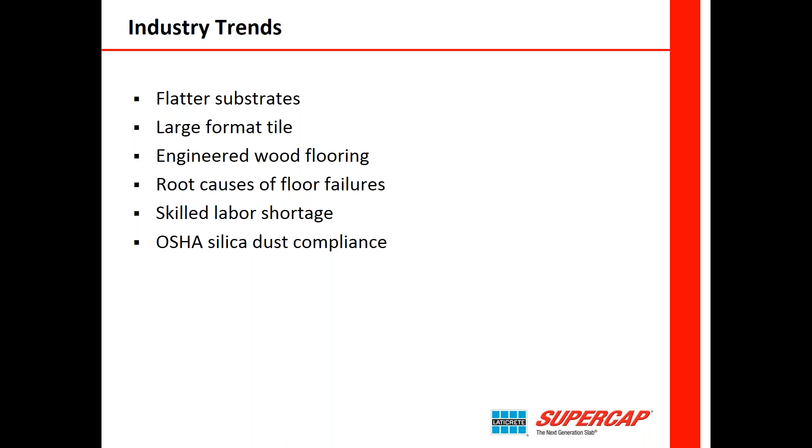I'm sure that everyone attending this webinar is aware of the importance of floor flatness. For years, the ASTM method F710 has set a baseline standard for floor flatness for resilient floor coverings on concrete floors. So it's used by the resilient industry, but it's also referenced generally by other types of floor coverings, such as tile, etc.

This method states that concrete floors shall be flat to within the equivalent of 3/16 of an inch in 10 feet. This is a gap under straight edge method. It also outlines the rough correlation between floor flatness, FF numbers, and straight edge tolerances.

So the concrete industry, in opposition to the ASTM F710 method, tends to use the F number system, while the resilient floor goods industry and some other floor goods companies have tended to recommend and use straight edge tolerances.

So you can see that there can potentially be a conflict when concrete contractors are using one measuring method, floor flatness, to put their slabs down, and the floor goods companies are recommending a different method—gap in 10 feet, eighth or quarter inch in 10 feet. There can be some disagreement between these methods of measurement.

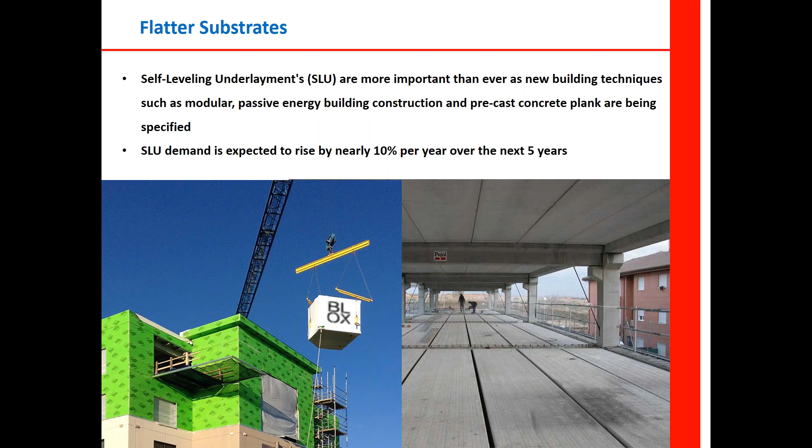The flatter the substrate, the better the installation, appearance, and product life cycle, which means a lot of manufacturers, designers, builders, and owners have concerns about floor flatness.

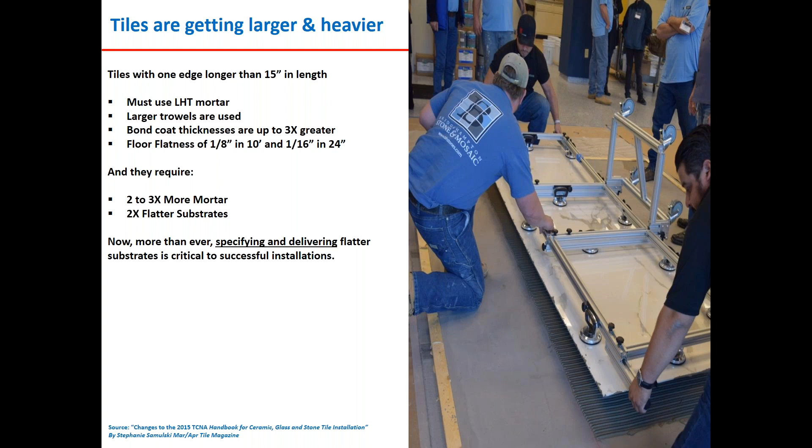With this trend, now more than ever, specifying and delivering flatter substrates is really critical to successful installations. You don't want gaps underneath these tiles. You want a flat floor that will minimize the amount of material needed to bond it, and you obviously need a flat floor to reduce hollow sounds, hollow spots, etc.

In a similar vein, engineered wood is another industry trend that is gaining more and more popularity, and it's similar in a lot of ways to the requirements for large format tile. Engineered wood requires flatter floors than traditional hardwood, and this segment is growing in both residential and commercial applications.

A typical engineered wood manufacturer's installation guidelines will require, for example, glue down applications with 3/16 inch gap in 10 feet or 1/8 inch in 6 feet. Pretty tight. Floating floor applications are even tighter, 1/8 inch in 10 feet for floor goods installation.

So some of the root causes of floor failures the industry should be aware of: we've talked about flatness out of tolerance. Two others that come up pretty frequently are moisture issues and alkalinity issues. Moisture and alkalinity in combination can break down the glues used to hold especially resilient floor goods down to the substrate. If you are having problems with any of these three things, flatness, moisture, alkalinity, these common issues will cause project delays, change orders, customer complaints, and finished flooring failures, which we obviously want to stay away from.

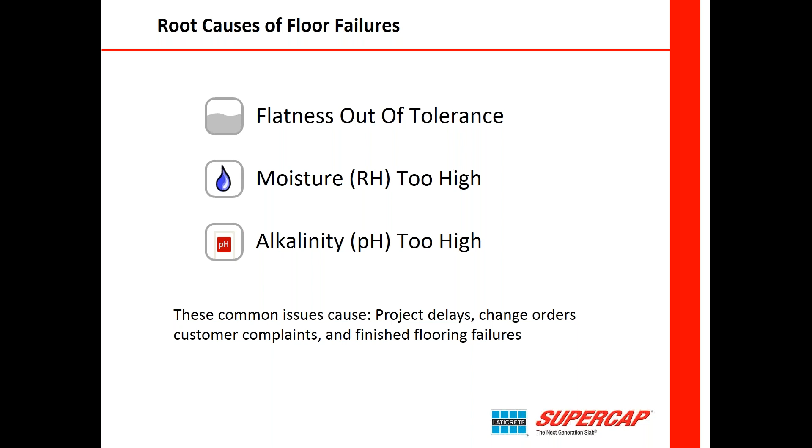As many of you know, we think this is a growing trend. Many organizations in the country like AGC are reporting that labor shortages drive up project costs and slow down timelines. There is a real skilled labor shortage in the country, and LATICRETE SUPERCAP system is helping meet the challenge of the diminishing skilled labor by taking less time, and you'll hear that throughout this webinar.

One of the key tenets and brand foundations of what LATICRETE SUPERCAP Ready-Mix Delivery Service is capable of is saving time, and we do it by capping concrete slabs. You see now that there's more demand for flatter substrates and capping them.

There's also a halo effect when flatter floors equate to faster build times.

The impact of labor shortages, as reported by GCs, remodelers, and design build firms, is that project costs are going up. I'm sure that'll vary across the country, but 59% is a big deal number. Project length is extending, so the carrying cost for a project is quite substantial, and those costs are leading to higher overall project costs because everything takes more time. Project quality is dipping a little bit, and customer satisfaction is dipping a little bit.

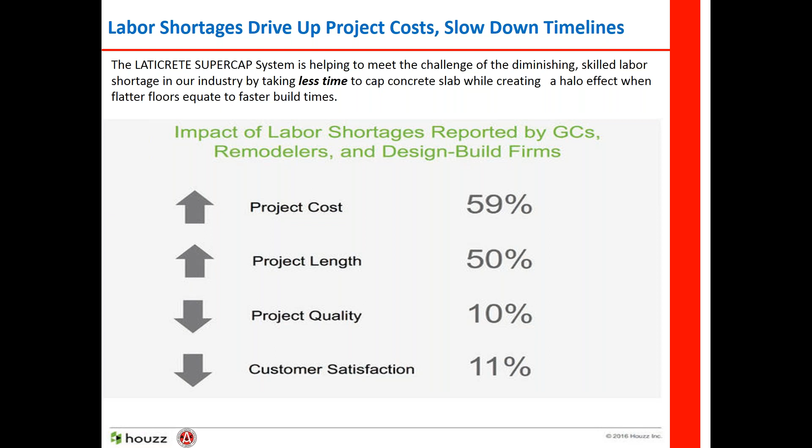There is one silver lining: general contractors' dependence on qualified subcontractors is up significantly, some report as much as 50%. So the subcontractor is in a very good position right now, especially if they have the equipment and the skilled labor, and they're taking care of their labor and adopting new innovative technologies like LATICRETE SUPERCAP, which is a proven time saver.

The OSHA regulations that we alluded to earlier have been updated. This year, the OSHA respirable silica concentration allowed for construction workers has been decreased. What this means is that managers responsible for health and safety on construction job sites will be required to do workplace exposure monitoring, and potentially medical monitoring for employees, if certain dust levels in the workspace are exceeded.

The LATICRETE SUPERCAP system, due to its nature, certainly reduces the amount of dust that goes into buildings. So we wanted to put some science behind this common sense feeling about our performance.

LATICRETE SUPERCAP commissioned an independent laboratory to conduct an on-site analysis back in October of 2016 on an actual job site in Boston, Massachusetts, to gather evidence on the basic question: does using the SUPERCAP system introduce respirable silica dust to the interior and exterior of a job site? The report provided to us based on this testing concluded that there was no respirable silica dust detected in any worker exposure or local area sample taken during the application of the LATICRETE SUPERCAP SC500 product.

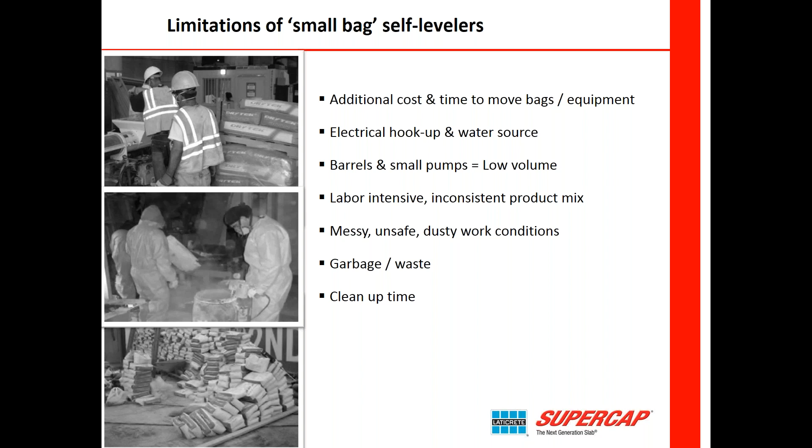Barrels and small pumps are slow, generating low volume and low throughput. It's obviously labor intensive, and you could get an inconsistent mix with all that labor. People get tired—every single one of those 50, 55-pound bags is being lifted by a human being. It's messy and can potentially be unsafe for work conditions, depending on the controls in the area. And as mentioned before, you have the garbage, the waste of all these empty bags to clean up inside the building, causing more dust, and the cleanup time can be very substantial.

So what is the LATICRETE SUPERCAP system? For those of you who are not aware of it, the heart of the system is a patented pump truck technology. It's a mobile manufacturing facility that drives up to the job site, delivering premium self-leveling underlayment. It's a cementitious calcium aluminate self-leveling underlayment, delivered in bulk through the patented truck.

Calcium aluminate cement, because it's more stable, has less shrinkage, and has finer capillaries that contain less moisture than Portland-based cements.

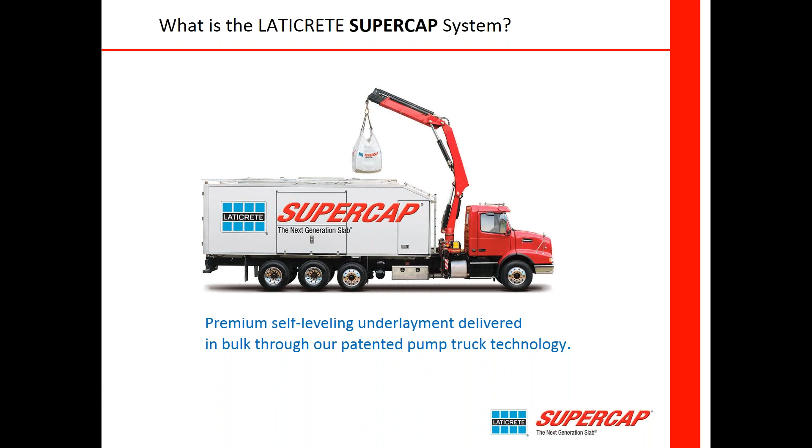The SUPERCAP mobile blending unit is an extension of our manufacturing plant. It's a computer-controlled mixing plant on wheels. We blend the powder and sand at street level. We can pump up to 50,000 square feet a day, up to 50 stories high.

Includes a vacuum dust collection system for job sites free of silica dust, an onboard electric generator, a water supply tank, and a chilled water supply that can be adjusted for poor weather conditions. This is especially important in Florida, Texas, and Louisiana, places where daytime temperatures can reach 105 and 110 degrees for months on end.

And many of those people are subjected to pouring concrete in the middle of the night, which is also not a safe situation. So we've adjusted, designed, and engineered a chiller unit, which will deliver the water at 72 degrees Fahrenheit, which is laboratory conditions, even on a 105 or 110 degree day.

I was on a job down in San Antonio where we did that during the summertime, and it was 105 to 110 every single day for almost two and a half months.

There's a long arm articulating crane for lifting the super sacks, mixing tanks and rotor-stators, and the computer-controlled blending ensures a consistent mix and placement at a standard 4,200 psi.

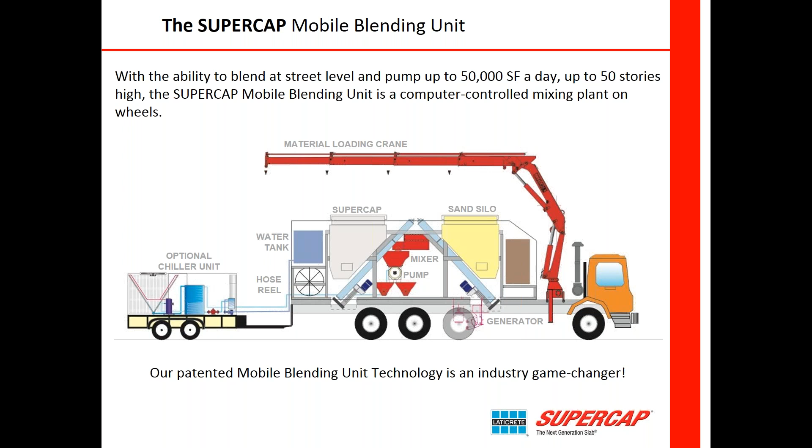The SUPERCAP system's primary benefits are significant time savings. It's cost effective, and we'll show you some comparisons to prove that point. There's increased job site safety, and what GC or subcontractor isn't subjected to that and isn't made aware of just how important that is to not only worker safety, but also insurance safety.

OSHA silica dust compliance is a big deal, and that'll start rolling in on September 23rd of this month, and there will be monitoring. I think everybody's aware of it. It's a big issue, and we solve the issue.

We can produce incredible volume. The mobile blending truck pumps 30,000 pounds an hour. That's equivalent to pouring 600 bags an hour. So with this, time not only flies, it also travels through a hose.

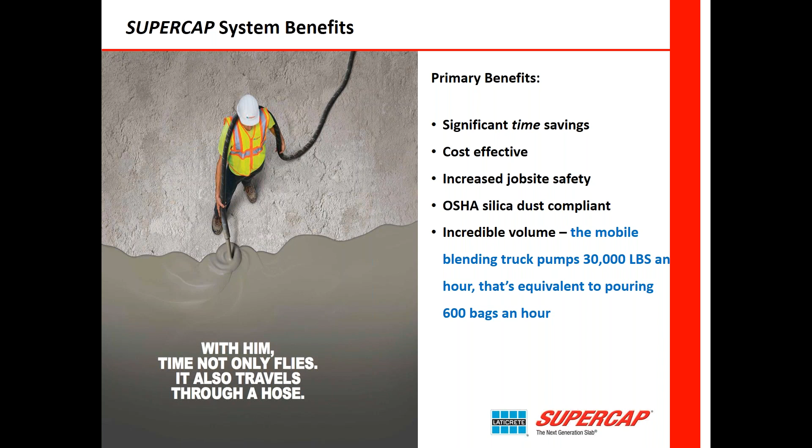The additional benefits: it's convenient and hassle-free. There's a consistent quality in that computer blended mix. It's Greenguard certified, and I think the A&D community will find that especially important. If you're building any kind of LEED certified building, we can contribute to that.

We have a small job site footprint, especially important in downtown areas where hospitals and hotels are perhaps nearby, and that job site footprint doesn't tie things up. Because of our speed, we're not there that long, so that's also part of our future.

The only thing that goes in the building is a hose. We did a national survey on that, and people said, how wonderful - we don't have to have all that staging, pallets, bags, cleanup, and everything else. The only thing that goes in the building is a hose.

And the only thing that we need on the job site is a hose. We do need a garden hose - I haven't had any problem with that yet.

The trades can be back to work in 24 hours, which is a big deal. You can walk on the floor in 2 to 4 hours, but the trades can be snapping lines in 24 hours. And the LATICRETE industry-leading warranty program is something that is a great peace of mind for the owner, for the GC, and it's something that we're very proud of.

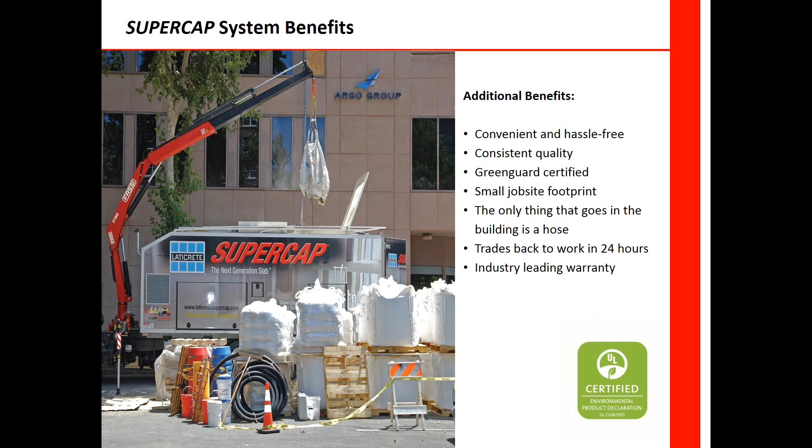We're going to now show you a video of a project we did up in Salem, Massachusetts. The LATICRETE SUPERCAP authorized applicator is Allegheny Contract, an applicator with great leadership and staff who do a great job with SUPERCAP. So enjoy the video.

When the city of Salem, Massachusetts announced plans to transform its Registry of Deeds building into a new and modern courthouse, the project became the ideal showcase for the LATICRETE SUPERCAP system. Part of Salem's nationally registered Federal Street district, the building was completed in 1909.

More than a century later, the demolition process revealed a number of unexpected issues, and general contractor W.T. Rich reached out to New England's LATICRETE SUPERCAP applicator, Allegheny Contract.

When they started the renovations and the demolition, they realized that the topping slab was failing. They came back in here and tried to use the old school system with small bags, and it would take them probably a month just to pour the concrete. They did some testing, and they weren't happy with the result.

We came in here, saw that the floor was very unlevel, and we took pins and placed them in all different increments. So we're pouring very different heights, and yet they're all at the exact same elevation.

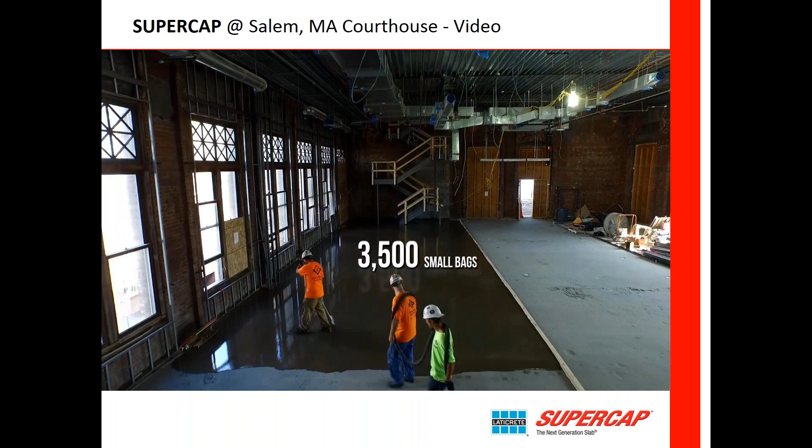Today we're pouring approximately 10,000 square feet at 1.5 inch deep thickness. It's going to translate into about 3,500 small bags, which a couple of years ago, using the small bag technology, would have taken us probably a day, day and a half just to get material in the building.

Everyone that I've asked today if they thought it was going to go like it's going told me no. They couldn't believe the speed and the quality, the flatness of the floor, compared to what they were used to just a few hours ago.

The impact on the project is felt by every trade and, of course, the general contractor, who knows firsthand what the LATICRETE SUPERCAP system means to the project's costs and workflow.

So far, the experience has been great. It looks like a good product. We're getting it in quick, no dust, one-day install. Everything seems to be working just fine.

It's not necessarily the cost of the material or our procedure, but it's the cost of their schedule when we compress it, maybe 2 weeks or 3 weeks or a month. It's huge to them.

The most important part about this is we're able to get in, and we've still got contractors working around us. As you can see, there's no dust here. They have no problems working above us. There's people working in the attic, and they're working below us. So the job is still progressing, with no effect to any of the other subcontractors except the area we're working in. The best part about it is I can start regular work up here on Monday morning.

One of the advantages of SUPERCAP is we can come into a renovation like this and do 10,000, 20,000 square feet with no issue at all, or we can do a 30-story building in Boston, over Parcel C at the seaport. We're doing 18 stories over there. We'll pump all the way up there without having to bring any dry, unmixed materials into the building.

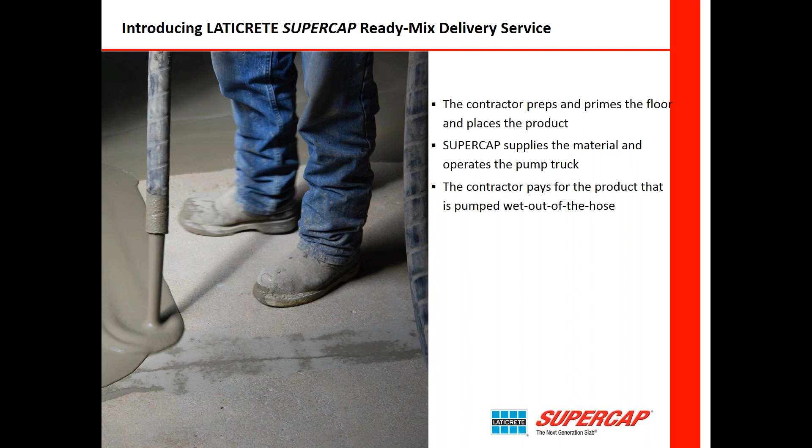So much of today's architects, many of today's architects, are using pan on metal deck construction. This is a typical floor construction method for raised floors. Ready-mix Portland concrete is pumped, usually bull floated, and left to cure. The process of curing is where the deflection occurs.

I've talked to many structural engineers who tell me that no matter what techniques they use to design a slab -- cantilevered designs, or making some assumptions about how the slab will deflect between supports -- they can never guarantee that they will get these slabs to not deflect beyond the tolerances of modern floor goods.

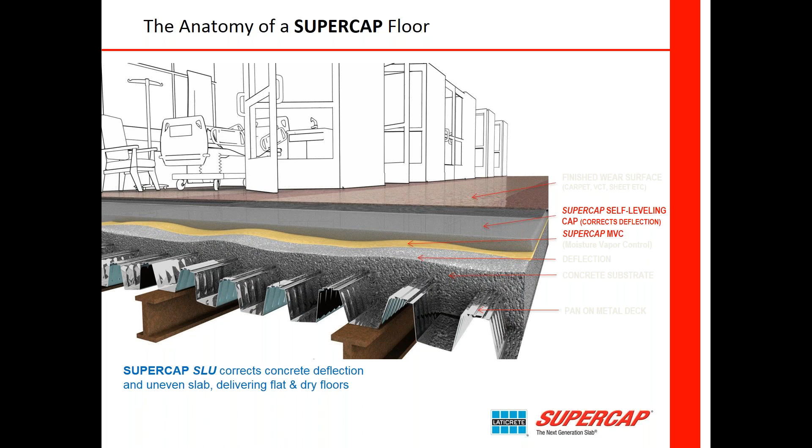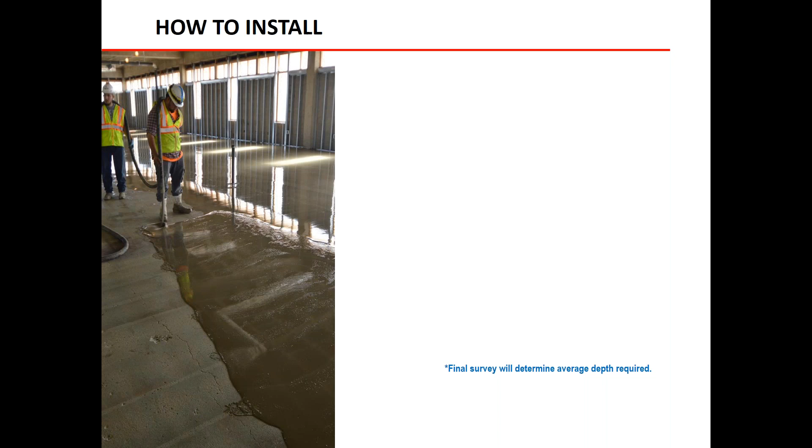Going to briefly go through self-leveling 101, and this is how to install. First step is in new construction: the concrete is placed, then bull floated or broom finished, depending on specs, to a minimum tolerance of something like FF15. No power troweling would be required, no curing compounds would be needed. We want to stay away from those things if we can.

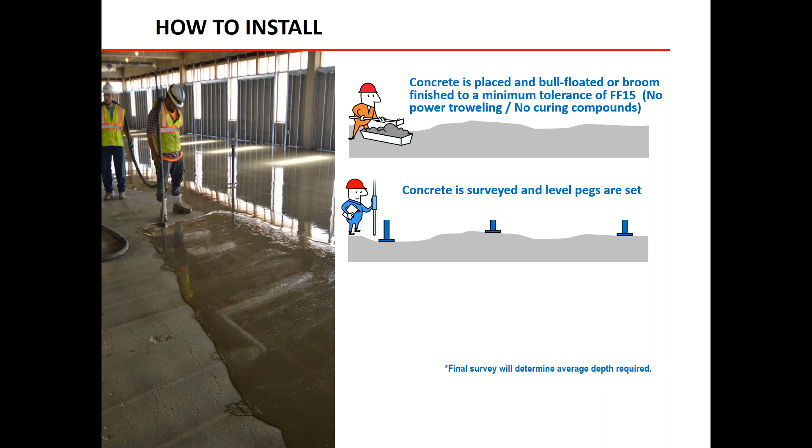The second step is we let the concrete cure, and the concrete is then surveyed by the contractor. Level pegs are set. This allows for a quality control method that will help during the installation of the self-leveling underlayment to keep everything perfectly level.

And last step, the SUPERCAP SLU will be pumped over the entire surface up to just over the tips of these level pegs at a nominal, say, 1/2 inch, using the SUPERCAP truck. That final survey will determine the average depth actually required, but 1/2 inch is a typical depth.

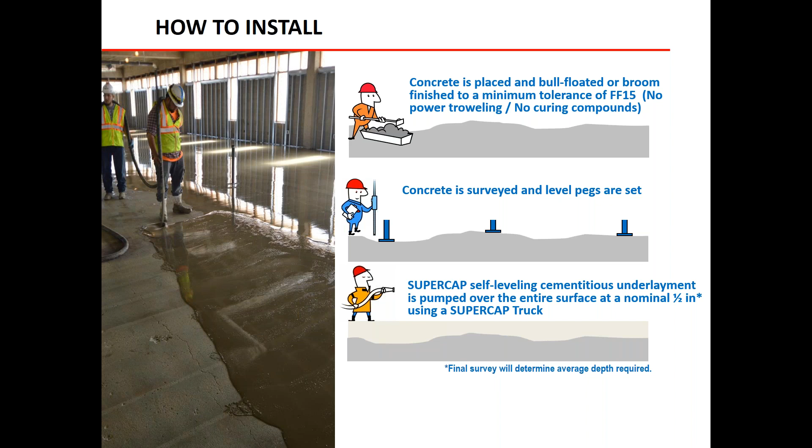This is a case study on a famous location in Boston called The Point, where they were building a 34-story residential tower with retail at street level. The overall project was 375,000 square feet. It was a GC-controlled comparison of LATICRETE SUPERCAP versus a traditional barrel mix and pour, using a premium SLU product.

The GC wanted the flooring contractor, Allegheny Contract, to prove that the SUPERCAP system was as good as they claimed. The flooring contractor and authorized SUPERCAP applicator Allegheny Contract welcomed the challenge.

On the next slide, you'll see it was 34 floors that were being finished, at approximately 10,000 square feet per floor. So we're not doing the elevator banks or the stairwells.

We had to correct deflection of approximately 1 inch. There was a higher than anticipated deflection that the contractor was not only surprised at, but also chagrined at, because it was a real problem.

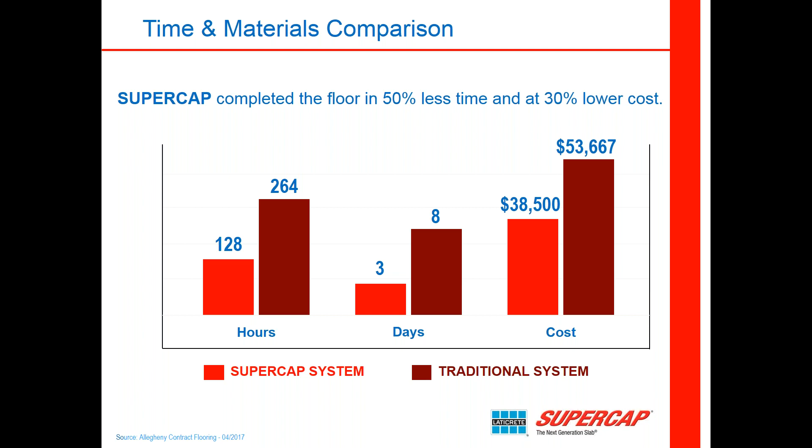Here's some stats on it. There were 652 50-pound bags versus 22 super sacks. There was 16 hours load time, 0 for SUPERCAP. There was freight time; the traditional needed 16 hours also, but there was no freight time for SUPERCAP. Removal of bag waste, none for SUPERCAP. Compliant with 2017 OSHA regs, yes. Total hours: traditional 264, SUPERCAP 128. Total days: 8 and 3.

That was monitored by a third party from the GC who wanted proof of it. It was great for Allegheny because they won the entire contract, and we're very proud of the results.

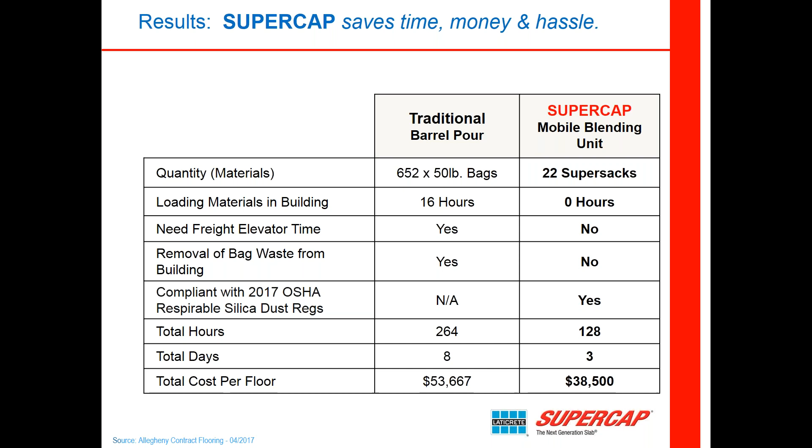An early adopter of the SUPERCAP system ready-mix service was tile and stone contractor Barry Kemna of Kemna Tile. We did a little spotlight on what he did here at the BMW dealership in Grapevine, Texas. His comment was, having access to technology that saves time is a big deal.

Combine that with less man hours and being compliant with the new OSHA rules, using the new SUPERCAP system with a simple and proven ready-mix type of delivery service is a win-win-win. Barry's team had been placing SLU for years, so they had a very good understanding of what to do.

But they upped their game by being able to do it in just 1 lift, because the GC actually had to have them come back a few days later to do the second lift previously. The second thing Barry said was that LATICRETE SUPERCAP Ready-Mix has just enhanced our reputation and our ability to go after larger projects. That's a big deal.

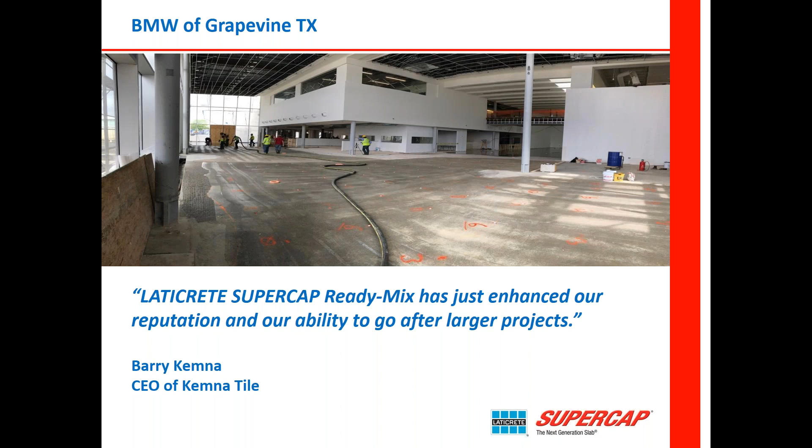So if you're embracing new technology and innovation, from what we've said earlier, he just upped his game without any investment. He didn't have to buy a truck or lease a truck. He's just paying for what's wet out of the hose. It really made a big difference to him, and we think that's going to ring true for people around the country.

So when should you consider the LATICRETE SUPERCAP Ready-Mix system? Our basic advice is to target larger projects. Some rules of thumb might be a minimum of 10,000 square feet at 1/2 inch, or 5,000 square feet at 1 inch, as minimum project sizes. Below that, it may not make sense to mobilize the truck and crew in all cases.

We encourage GCs to pour early on an open slab. That makes the work more efficient for other trades typically. Much of our work is poured after the exterior walls are up, and a lot of it is poured either before or after interior walls are up. But pouring before interior walls are up might save some time and make installing those interior walls easier. Certainly the contractors that do framing really appreciate a super flat floor to work on.